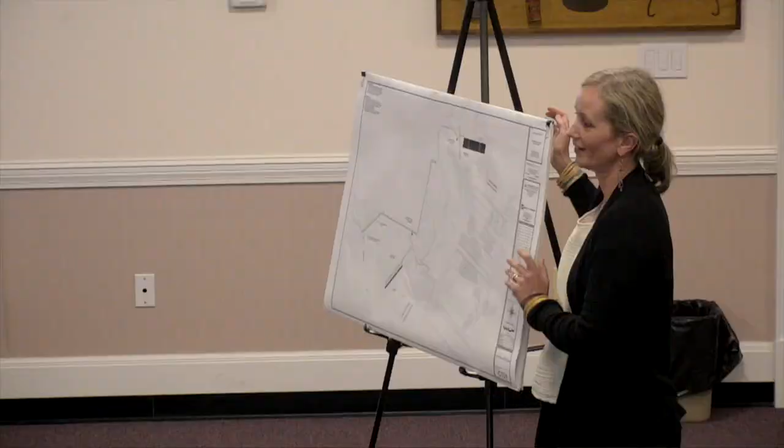I'll just introduce myself, even though this is an informal discussion, just for the record. Sarah Stearns with Beals and Thomas, and with me are both representatives of Renewable Energy Partners, Development Partners, Hank Rumet and Tom Mellahan. Thank you tonight for your time. This is something that we thought we would just do informally to come in before you. We're in the midst of preparing our applications for these two projects, and we thought we'd come talk to the board and just give you an overview and open it up for any preliminary discussion or questions before we finalize our application packages.

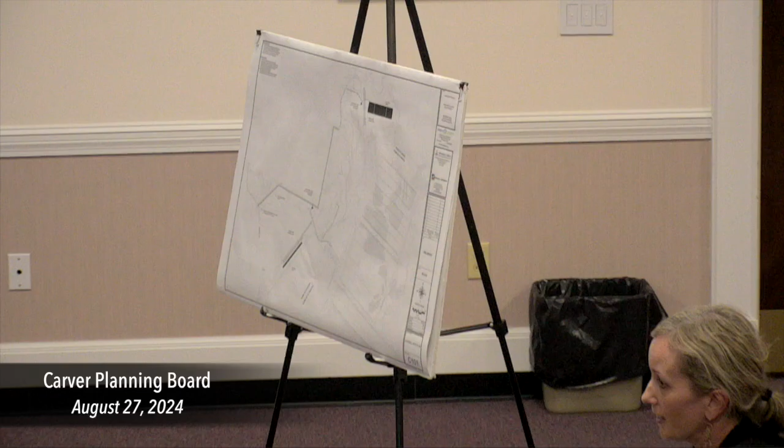So it's a little bit hard to see, I also have an aerial photo behind that. This is a site owned by A.D. Makepeace off of, I guess we'll say, off of Cranberry Road. There are multiple ways into this very large site. This is the zoning map, it's teensy, but— Do we actually have a name of the pond? No, it's unnamed, it's an agricultural reservoir that's on the property. No, I think it's important to know that. Yes, it's basically man-made.

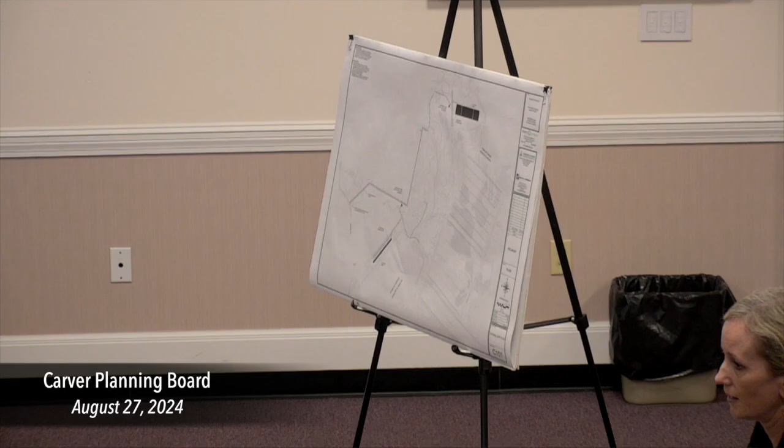That is one of the stipulations under the SMART program for these prospective floating arrays, that it must be a human-made pond. The state has suggested types of ponds, like stormwater ponds, wastewater ponds, agricultural reservoirs—that's called out specifically—that are human-made. So these floating projects are not allowed at the state level on naturally occurring ponds, which leaves a handful on agricultural lands that are potentially viable for this type of project. On this site, it's partially within the industrial district. Part of the site is right near the Ocean Spray receiving plant off of Federal Road, but, you know, again, it's hundreds of acres.

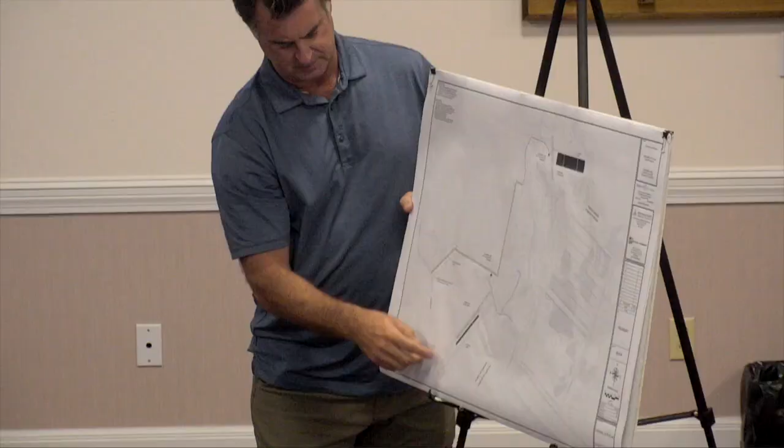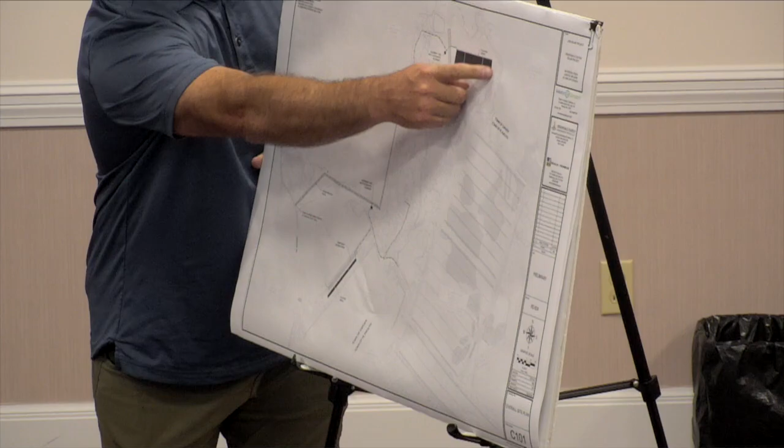So this is Federal Road here in Carver. This is the Ocean Spray lot, basically, I think, Sarah, like a 600-something acre parcel - overall, actively farmed by Makepeace for cranberry operations. This is a 13-acre agricultural reservoir, and this is a 3 or 4 acre-ish agricultural reservoir, both of which serve the cranberry bog operations.

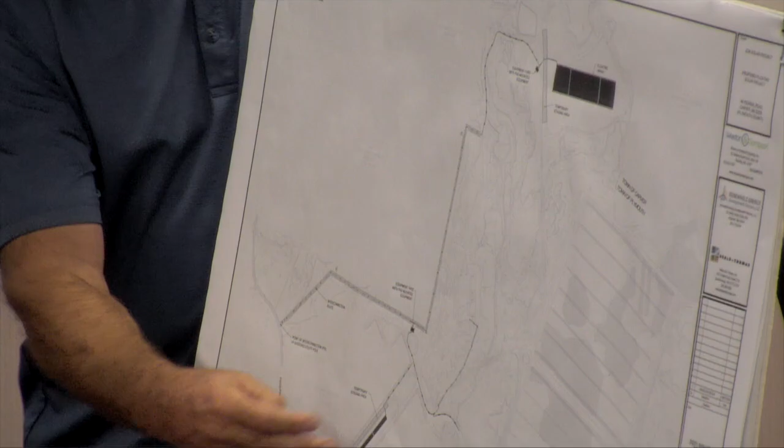So that's just for orientation. The scale of this thing is 200 feet on this scale, so we're a couple thousand feet away. The Cranberry Road's up here, ballpark. So both reservoirs are located well interior to the property. This part of the property, up to about here, everything below this line is industrial zone, and everything above this line is residential agriculture. So one of the reservoirs is in the industrial zone area and the other is in RA.

Just a quick question - when I'm looking at the map Ms. Stearns handed us, the red line does not include the lower reservoir. The line delineating, I'm guessing, the project site - or? That's, I think, the property line. Let me look at what I just gave you.

Yeah, I'll give it back to you in a second. The lower reservoir is this sort of linear canal, okay, here - I was looking lower than that, okay. Yeah, it's right here. So the river is the Plymouth-Carver town line, so this is all Plymouth. Cranberry Road is up here - you drive in through the bog roads. This is the 13-acre, give or take, reservoir, and then this little linear feature is the 4-acre.

Are you going to use singular access, or are you going to use dual access, one for each site? What do you mean - are you going to use one access from Cranberry Road, or are you going to use two accesses? Well, there are multiple ways in. The Federal Road entrance is more than likely going to be the active construction entrance, and that's something we're talking to public safety in both Plymouth and Carver about. So we'll just - whatever the preference is - but I think it will more than likely be the Federal Road construction access, and then we'll work with the landowner about preferred way in for longer term operation and maintenance.

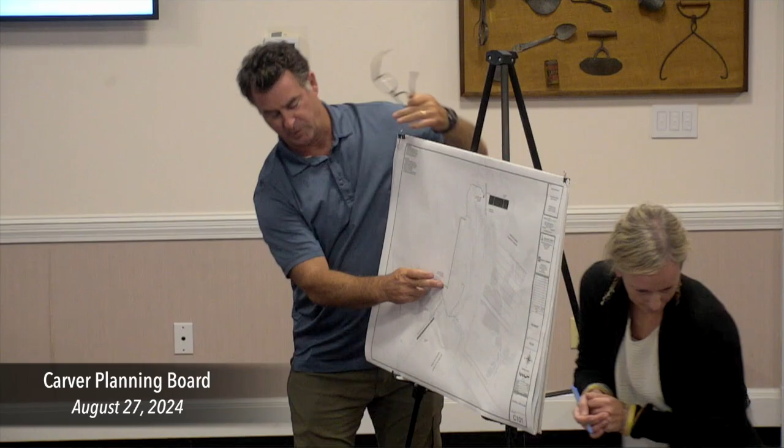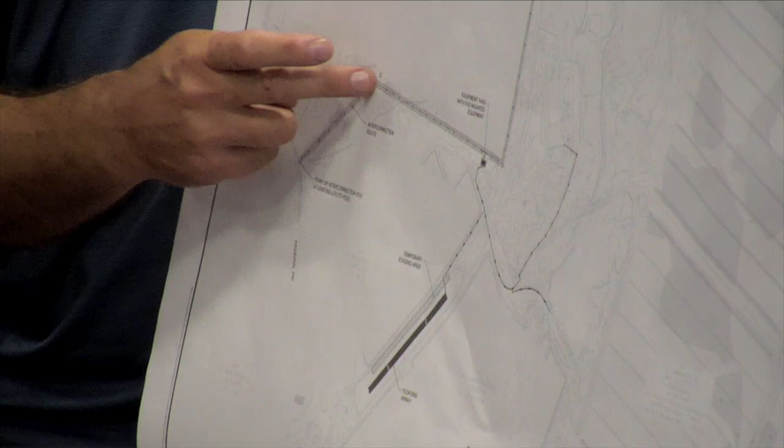Underground from this array and this array, all the way to this common point here. And then there's some existing wooded area, like a cleared wooded corner through the wooded area out to Federal Road.

Now, why would you do that? Our bylaws require that it be underground, so why would you do it differently? It's just that we'd certainly put it underground if we had to, but frankly it's cheaper in that area, and you can't see those from the road. So anything visible from the road, outside of what the utility requires overhead, we would put underground.

If it was visible from right of way? Well, it's not about visibility. It's underground unless the utility requires otherwise, per our bylaw.

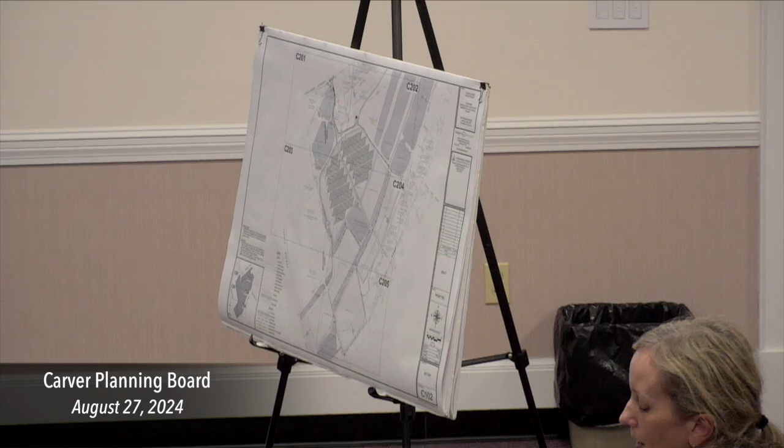Now this is, you'll be able to pick this bog, but also build solar on it. Yes, so this is what we're referring to preliminarily as Fosdick Road Solar. This is a proposed dual-use project on 2 pieces of existing cranberry bog owned by Johnson Brothers Cranberries.

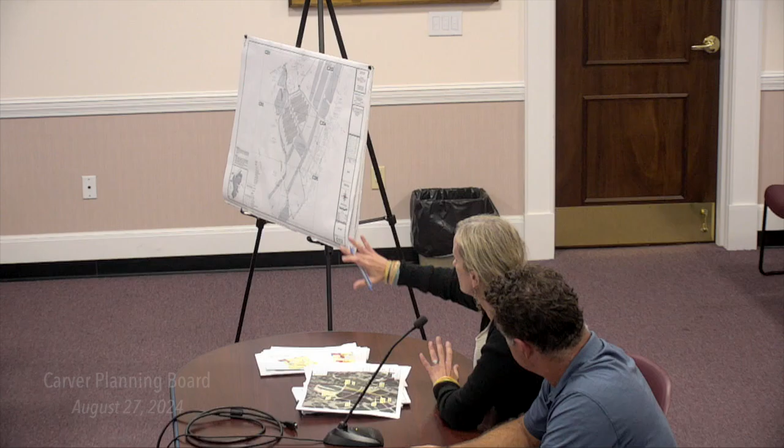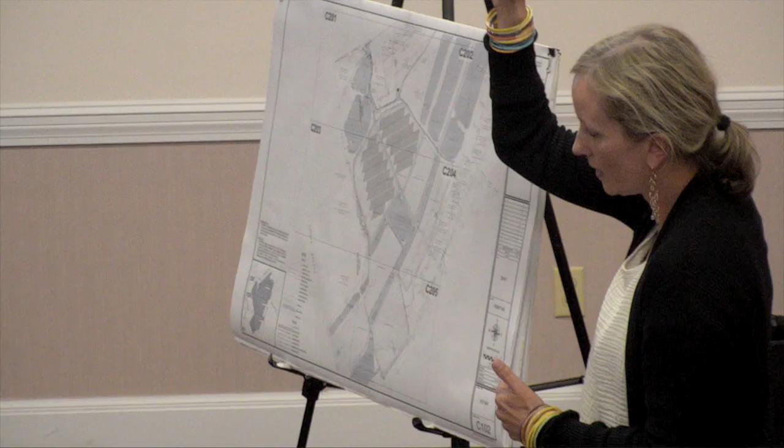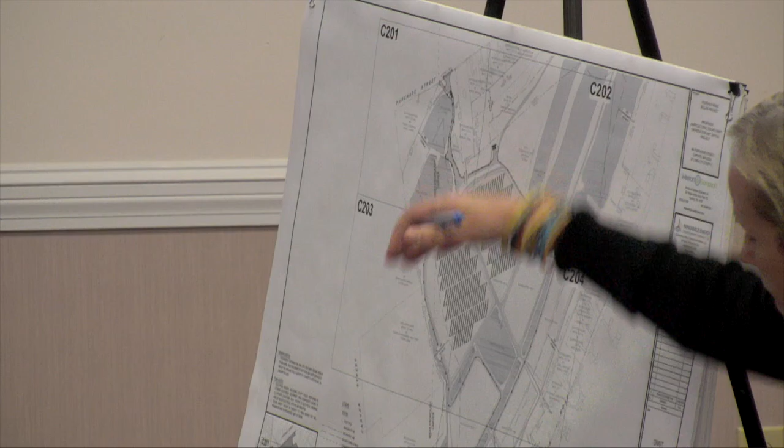It's the raised panels and spread out rows to allow for equipment passage. The Middleborough-Carver town line is here, but the work is all in Carver. Those 2 bogs are considered upland bogs, built from upland materials, so not a lot of deep peat deposits in these areas, a bit more structurally sound in terms of anchoring and that sort of thing.

I know this board has seen these types of projects before, so this isn't quite as new as the floating concept, but since we were going to be here anyway, we thought we'd mention this project. It's been in development for quite some time and gone through several iterations. No battery storage proposed at this point, and it's really just limited to the 2 arrays with interconnection on Purchase Street, towards the top of the page there.

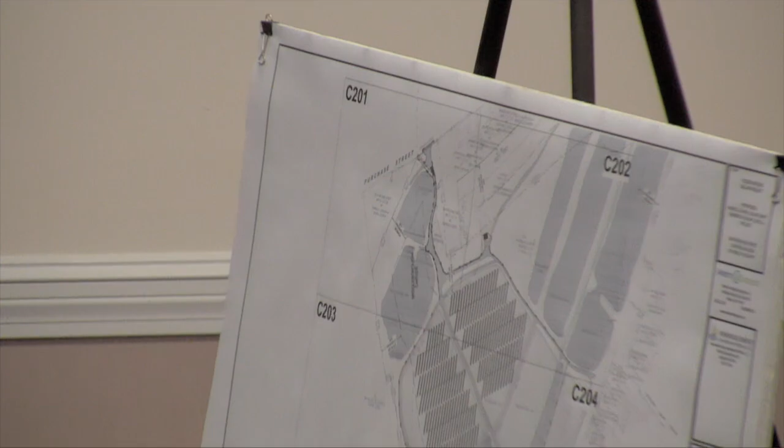We'll flag this for screening. So one thing we did know on this site, because this is a large bog complex, bog and water complex, is that there are a couple of areas on both Fosdick Road and Purchase Street where there's a small break in the existing tree line. So we put together a preliminary sightline plan, and we'll submit a final version, but just to give you an idea of the analysis we're looking at right now.

So this will be part of the discussion and submission as well. Once again, we'll have a site visit and we can see it with our own eyes, but wanted to just provide a little bit of context with that.

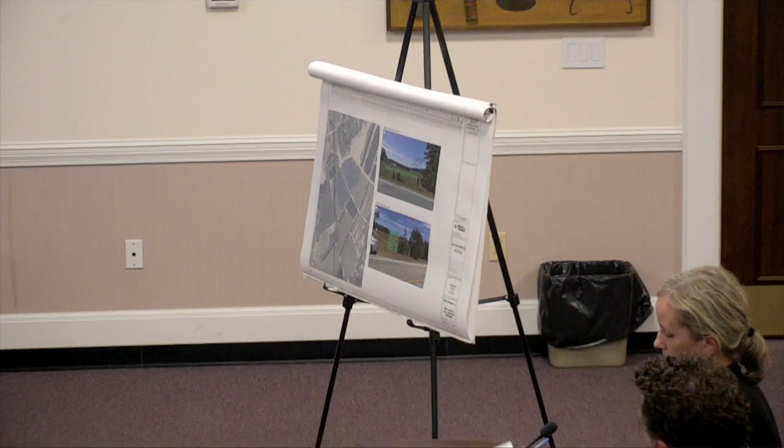So just a few other points. Again, no tree clearing, no need for new access. There's an existing bog road for the complex with a paved apron that we would protect with riprap during construction, but no significant grading. There's no proposed site grading or regrading, tree clearing, or significant infrastructure work. So it's a relatively straightforward install of an elevated array on these 2, about 20 acres, the 2 upland bogs combined.

And we've been working with the landowner for 4 years now to tweak the design and make sure he's comfortable with equipment access and his ability to farm, relocating some irrigation lines prior to construction so that everything works in harmony. The game plan is for that project to live in harmony with his cranberry operations for 20 years, and his plan is to remain the farmer on this property. For one, I'm very happy to hear it's dual purpose.

Yeah, I should have led off with this. My company, Tom and I, two local guys, we've got 2 operating projects here in Carver, so we've got some experience with your predecessors, and I know the concerns back then, aside from typical engineering concerns, mostly revolved around visibility to the neighborhood and character of the neighborhood. So that's why we recognize there are a couple spots along 2 public ways where you could get a glimpse into the site, and I think they can be readily addressed with some strategic screening.

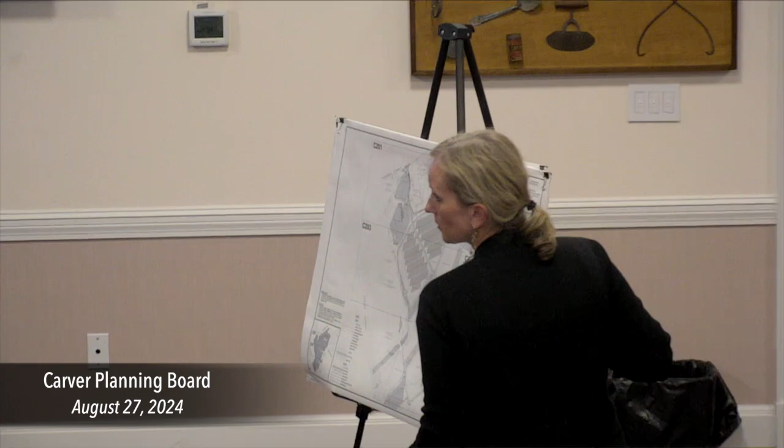How close is this to the Middleborough border? It's close, yeah. The black line there is Middleborough. So just to be clear, none of the proposed work is in Middleborough. But the lot line that runs through the lot, that's why I asked, because I thought those 2... it goes right through the center. Yeah, so his property is partially in Middleborough, partially in Carver, but we're keeping everything on the Carver side of the line. I think he himself lives in Middleborough. I think you're right, right over the line. Yeah, I think you're right.

We're also showing the 200-foot setback on this. So, as far as location is concerned, what might be the closest house to this? There's one up here on 30th Street that's probably the closest.

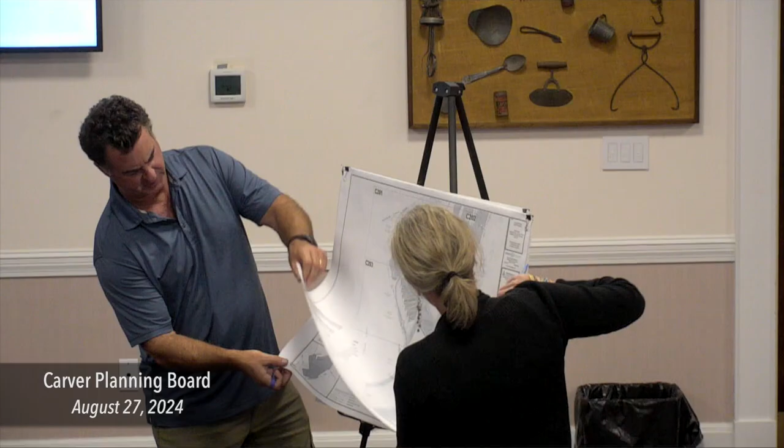Well, do you have the area? I don't know. It's a little easier to see sometimes on the aerial. So, yeah, the house on that lot is probably the closest, but there's really extensive existing vegetation. But the abutter that probably has the most potential visibility into the site is this one on the north side

of Purchase Street, because you can see across these bogs. It's 1,000 feet or so. Is that from Middleborough or Carver? That house is technically in Middleborough, you're right.

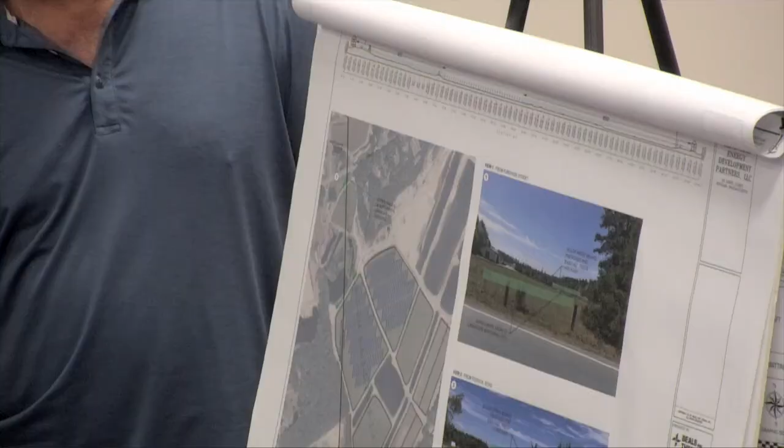I'm closest to Carver. I think it probably would be good to make sure they're aware of it in case they want to come to the meeting. Yeah, they'll be on the 300-foot abutter list. We go into adjacent towns with that. We don't stop at the town line.

So they'll be notified. And then there's some folks here along Fosdick Road, on the opposite side of Fosdick, that are in Carver, that, like I said, that's what they're looking at now, but there are some gaps in those trees that we propose to fill in.

I personally am going to want to see the screening limited to whatever's required for access to the site, so screen everything else, and of course underground for electric. I didn't realize that was a requirement, but obviously it's required to do it. I think we had proposed it anyways, underground all the way up. Perfect.

We can keep the neighbors happy with screening. It's really important, we want to be good neighbors. Yes, and the landowner does too. He's still going to be living and working here, so he's going to actually have to see it. I would imagine, good point, yes. And, he actually, with our screening proposal, won't be able to see it from his house either.

So it really is far away then, if he won't be able to see it. It's 1,000 feet away, it's clear, so if you're looking wide for it, you'll be able to see it. I honestly think it's in my backyard, but I'm not an abutter.